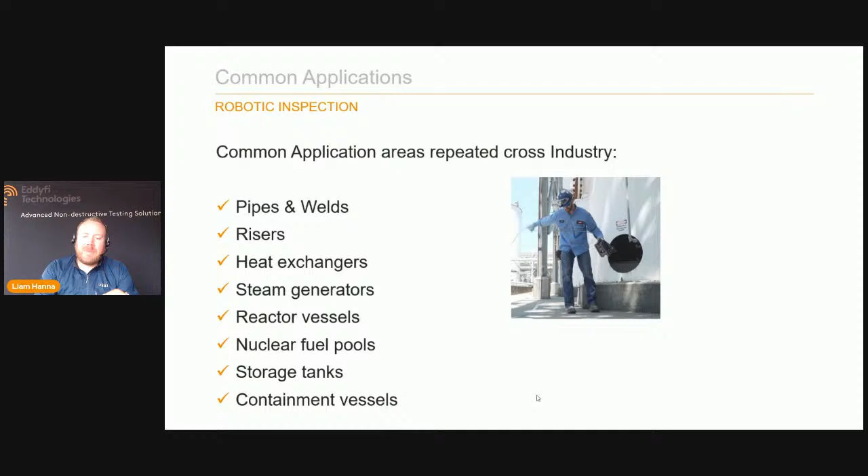Common applications across the majority of industries that we address include things like pipes, welds, risers, heat exchangers, obviously things like steam generators, reactor vessels, and then we look at more specific things like nuclear fuel pools, storage tanks, and then containment vessels. And you can see some images here of the various different robots being operated in this type of environment. Again, there's much more of this available in video format on our website.

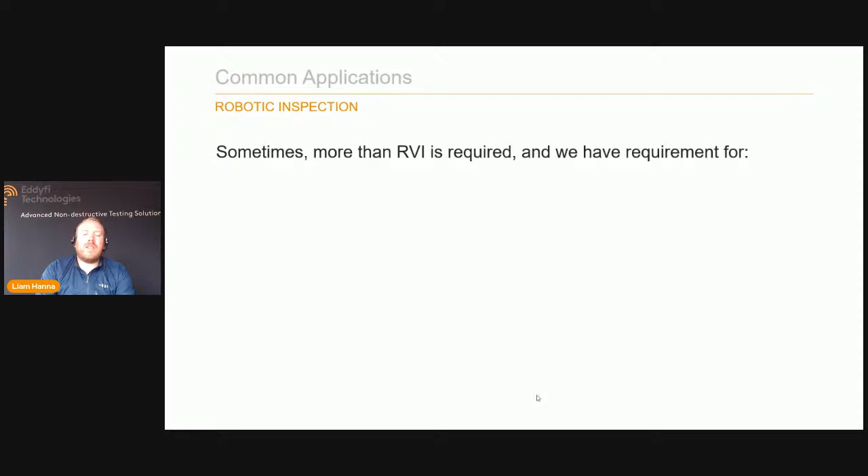Sometimes we need more than just visual inspection. If you're trying to understand the health of an asset and you want to make the best possible decisions, then of course you need as much information as possible. So sometimes we can try and look at using this visual inspection system mounted to a robot, and then we start to mount other types of sensors or other types of tools, which gives us either more information or carries out a task that will try and save money, become more safe, reduce environmental impact.

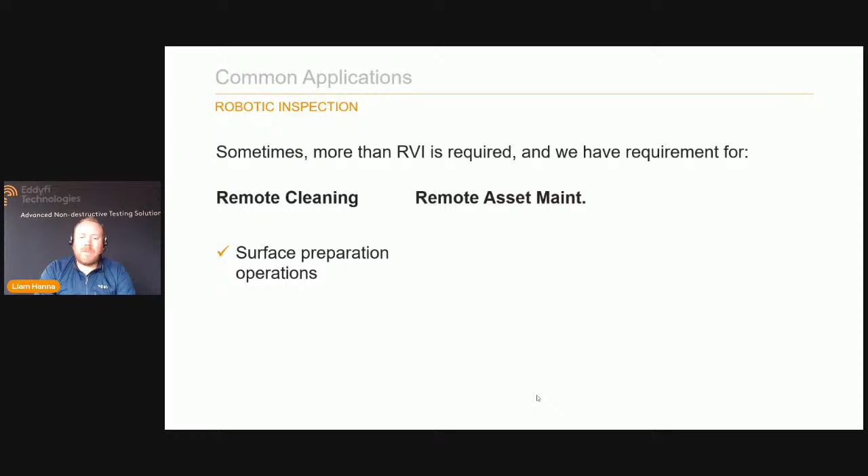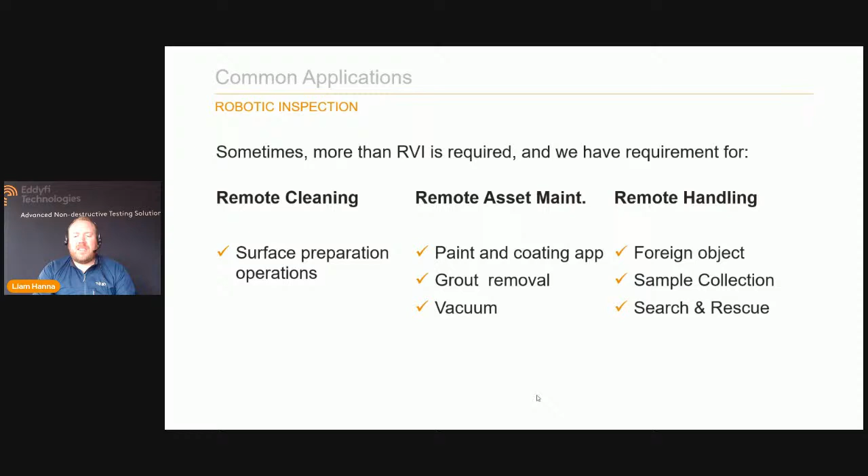This can include things like remote cleaning, so surface preparation for various different operations, remote asset maintenance, so things like coatings and paint application, removal of grout and vacuum, and then of course remote handling. This is really the area where we can start to look at taking a human task and then using a robot to carry out these tasks for things such as foreign object retrieval, sample collections, search and rescue, tool recovery, and then of course non-destructive testing application. And that is going to be really the focus for the rest of this presentation.

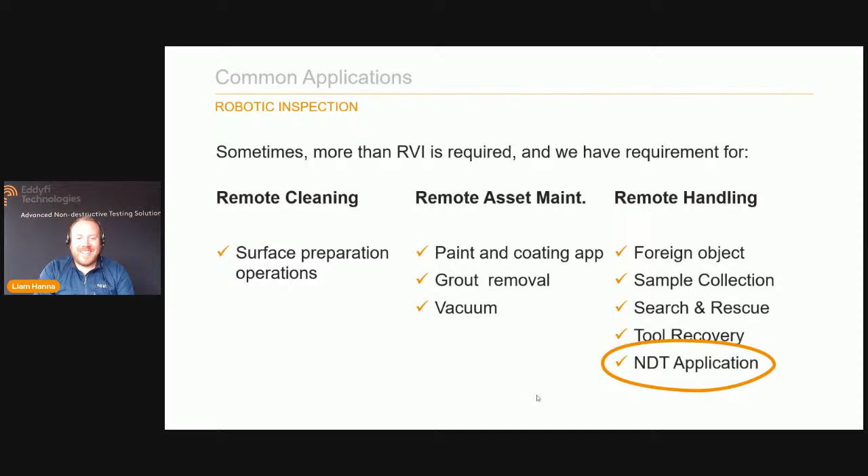And I think before we go on any further, after we've looked at the applications, we can really study how we've got to a position to really understand as much as we do, and then start to innovate and develop products that actually really do work in these environments. And the industries that we are prevalent in, really, if we take the top 5, this generally includes oil and gas, power generation, nuclear, things like security and defense, and then utilities.

And then we look at the applications, and we saw a brief snapshot of the type of applications, but we can simplify that even further and look at the 3 main applications as pipeline inspection, surface inspection, and vessel inspection. And then when you take a step back and look at all of these industries and all of these applications, we can see that all of these applications are generally shared across multiple industries.

So what we learn from the oil and gas industry for an application or a solution that we provide, we can directly transfer that to other industries, and we can learn from all these industries, and they can generally benefit from each other. And that's something that's really, really beneficial from a robotics perspective, because essentially a pipe is always a pipe. So when it comes from a delivery perspective, the system that delivers the equipment or the sensor can generally be very, very similar. What might change would be the non-destructive testing technique.

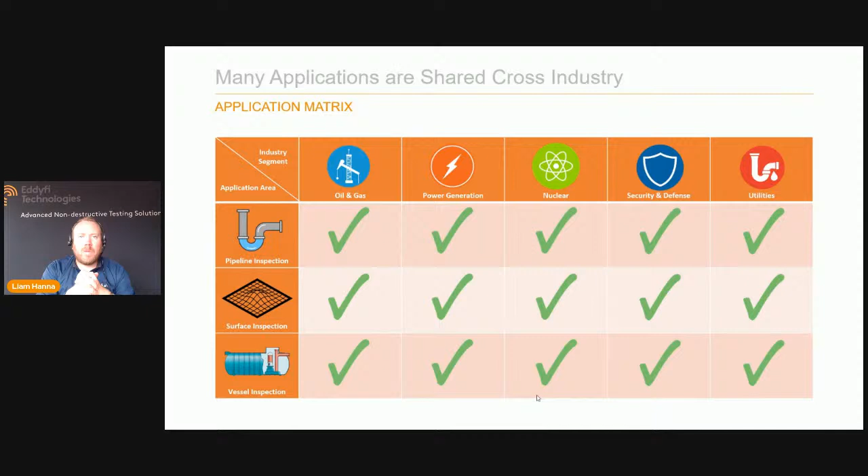But let's look at some case studies, some examples of what we do. And I think I've chosen 2 today to try and, again, simplify it as much as possible. Now, there's hundreds of examples that we could talk about, and I've chosen 2 specific ones, one being a magnetic surface-based crawler, and one being a pipeline inspection crawler.

So the first one we talk about is what we call a MAGG 310. So some of you may have seen this in the past under its previous name of a Mag HD, which is a magnetic robot with a high definition camera. Now the MAGG 310 is a slightly better name based on the fact that it is 310 millimeters wide, so we get some real understanding of what this means when it comes to this specific robot. So this robot is capable of traveling up to 100 meters. So it's a relatively long distance for non-destructive testing, relatively short distance from an Inuktun or Eddyfi Robotics perspective.

It has a high definition camera with lots of different offset, multi-directional lighting options, and laser projection available for some scalar measurement. We've got a number of different types of actuators and arms, which can be used for the integration of sensors and probes. And of course, we can look at further integration for things like tooling and maintenance applications or surface preparation.

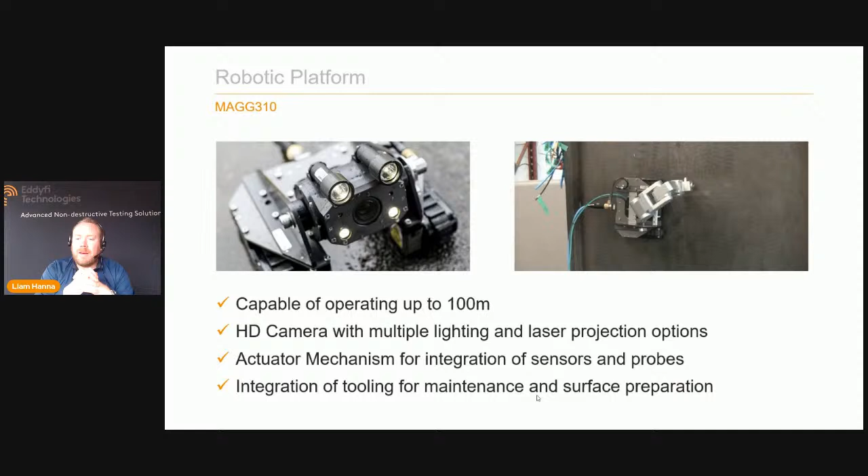One of the first probes that we've looked at using is one of these, a Sharck probe, which is a tangential eddy current array probe. So this is really designed for single pass crack detection, whether it's longitudinal or transverse cracks. It's got relatively wide coverage, and we can travel very fast with it. So we can travel at the top speed of the robot, which is around 7 meters per minute, I suppose, for an inspection scenario, and we can acquire data in that scenario.

You've got an actuator mounted to the front of the robot, which can, of course, carry out a visual inspection at the same time as the crack detection inspection with the Sharck probe. We can lift the probe off of the surface when we're driving around to try and increase the life of the wear parts of the probe, and then we drop it when we want to get to a location where we believe we've found something that we would like to measure.

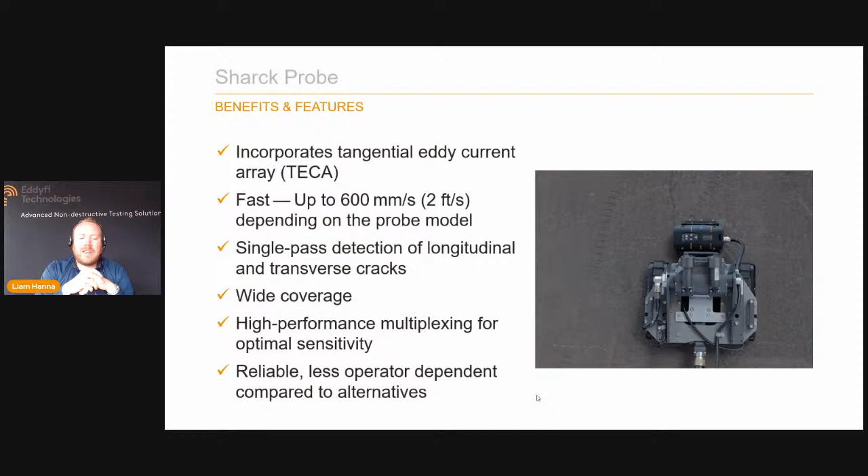Now, one of the benefits of this Sharck probe is that there's some compliance built into the bottom of it, and actually overall it's much less operator dependent compared to alternative solutions, which is really beneficial when we consider a robotic solution that's being sent into a specific location. Something to consider.

One of the other options that we have used frequently, and actually we've been doing some demonstrations today, so we'll have some videos available hopefully towards the end of next week, is with one of our dry coupled wheel probes. So we have an R-scan probe, which is available through our Silverwing Center of Excellence, and this has optical encoders included, so it doesn't have to be used in a ferrous environment. It can be non-ferrous or ferrous, but the magnetic encoder wheels keep the probe nicely in contact with the surface.

So actually the R-scan probe, if we're in a relatively well-prepared environment with no major corrosion pitting, for example, we can obtain good wall thickness scanning dynamically, without the requirement for couplant, because the dry coupled probe itself, the rubber material, is the same velocity as water. So this effectively means we can negate the requirement for couplant itself.

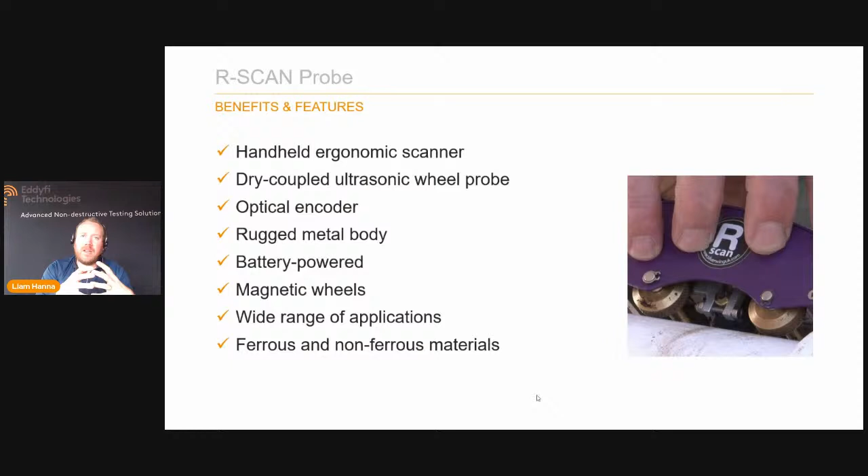But like I say, this can be used by hand or attached to a robot. If you're in a scenario where you can carry out some external inspection in a relatively safe environment by hand, you can do that, and then you can mount this to a robot, for example, and carry out a robotic inspection in this particular scenario.

One of the other examples that we look at is how do we operate in a marine environment. So we have multiple requests for thickness measurements, dynamic thickness measurements for things like FPSO hulls or ship hulls, or even things like jetty piles, like metal jetty piles, magnetic ones.

And actually what we can do here is we can look at... I'm going to turn the volume off because this video's got some terrible music.

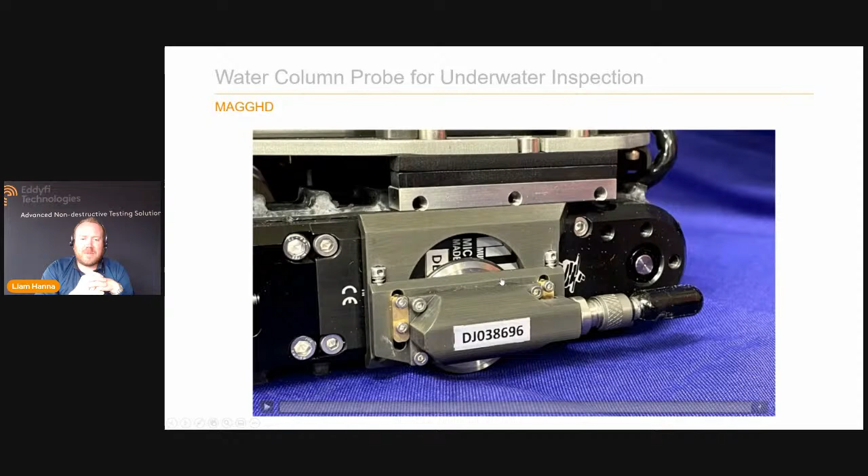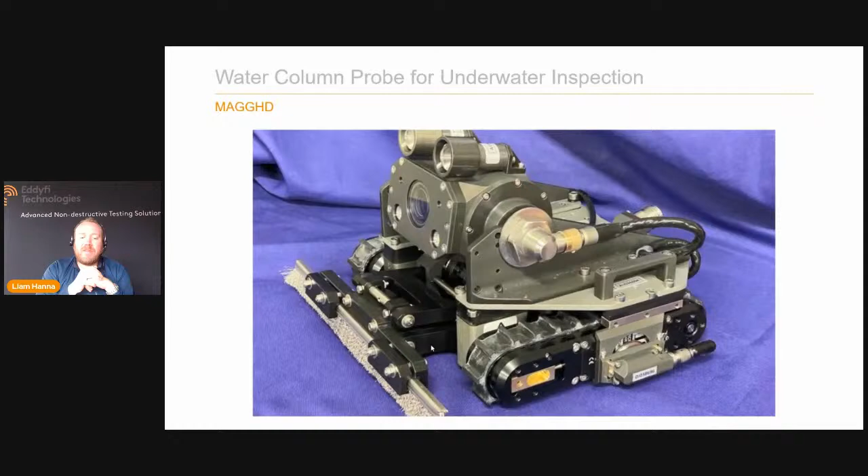We can look at a specific solution for that. So here we have the same system. It's a magnetic robot. In this particular application, there was a requirement to move some of the marine growth away. It was like some slimy marine growth. So we used a metallic brush on the front of the system, and then we have a UT probe attached to the front of this.

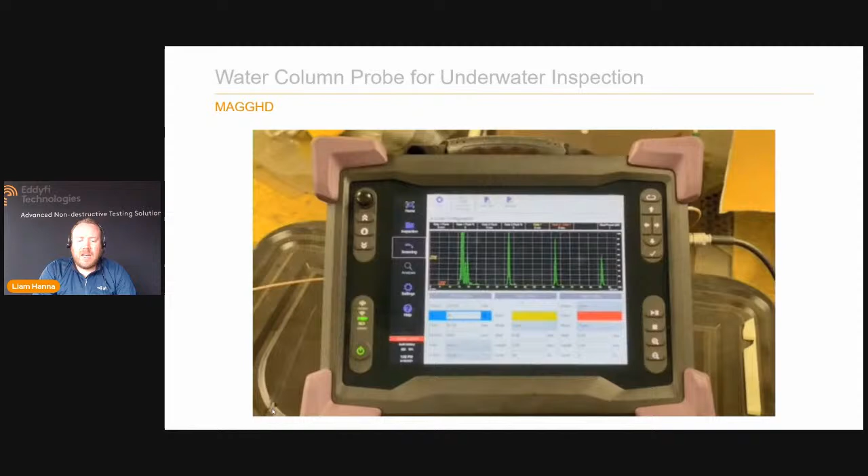Now, this particular UT probe has a 100-meter cable. You can see there's actually no interference of concern there. And we can get good B-scan data, so like a nice dynamic scan and an understanding of the thickness of the material. So this can be used 100 meters away, fully submerged in water. The complete system, the robotic system, is submersible to 100 meters.

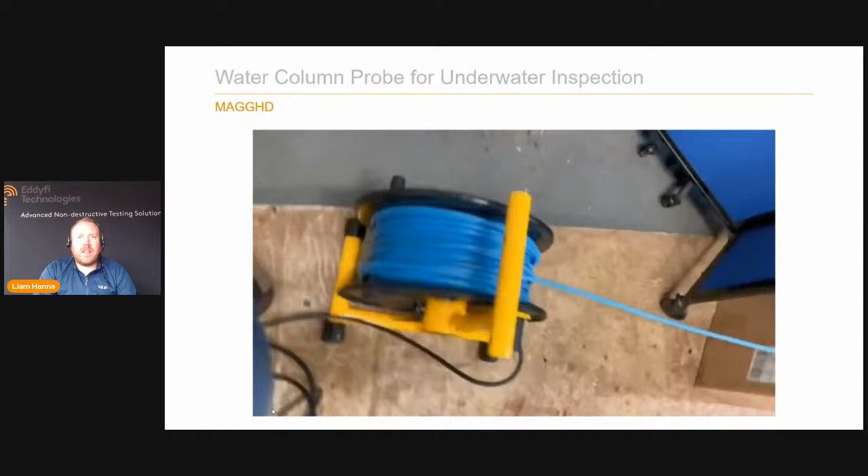We've got cathodic protection on there, so it inhibits some of the corrosion that can occur from operating in salt water, for example. And of course, the probe design is such that the water becomes the couplant for that particular environment. So there's just another solution that we can look at.

And finally, we've got examples where we look at pulsed eddy current. So pulsed eddy current is a fantastic solution where we're in an environment with potentially coatings. So for example, there's a coating on a material. It might even mean that we can't magnetically adhere, so we're looking at this purely from a surface perspective. But with pulsed eddy current, we've got probes that are able to be lifted away from the surface.

The distance varies depending on the material that we're looking at and what we're trying to see, but it's a fantastic tool predominantly for screening, but also for some sizing of defects, which enables us to go through an area and get a good understanding of where there may be some corrosion, for example, underneath a coating or through a coating. And then any destructive testing that needs to take place can take place in a pinpointed way, rather than having to remove large amounts of coating or insulation, for example. It's a real strong benefit.

Now, if you want to talk in more detail about pulsed eddy current, or indeed any of the ultrasonic techniques that we talk about, or eddy current, then there's people that are much more qualified than I am. My background is very much robotics and visual inspection, but there's people that will be more than happy to take questions further on this.

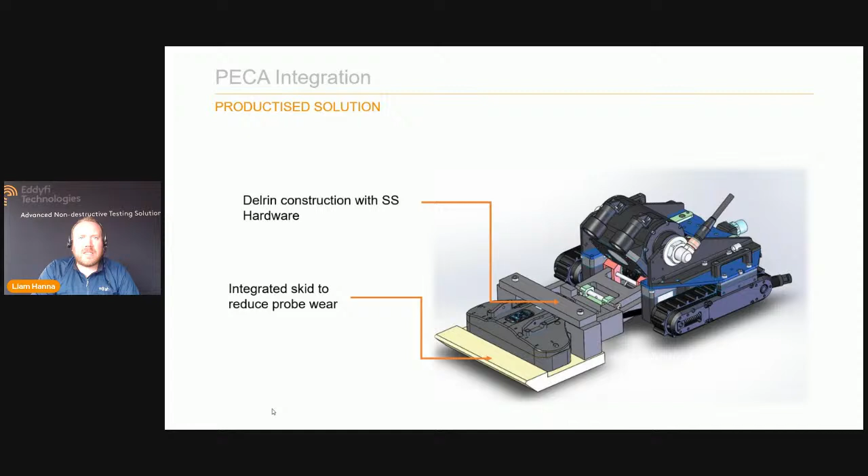And then finally, we've got the visual inspection. So visual inspection is a really important part. Essentially it extends the reach of the human eye into areas that we wouldn't generally be able to see. And it's often overlooked as relatively subjective, but when you start to combine that with UT and other NDT techniques, for example, you really get a good understanding of what's happening. And we can be more advanced in the way that we capture our inspection data.

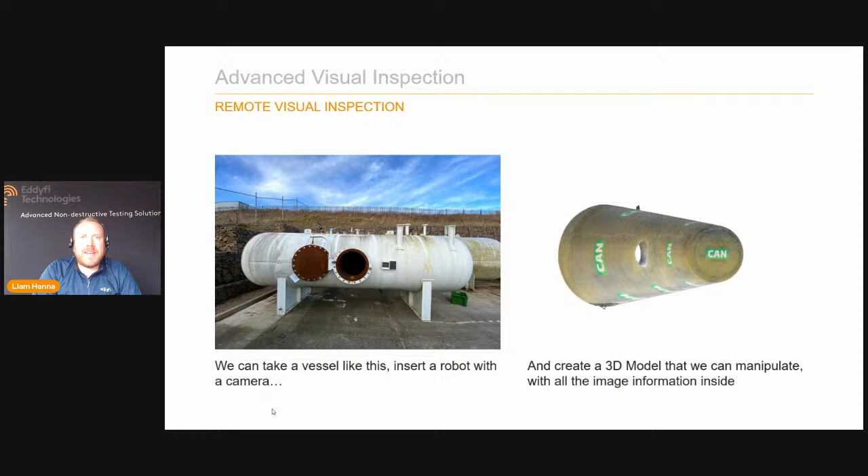So for example, we can take a vessel, have a robot enter it, take lots of images, and just using software we can create a 3D model that we can manipulate and that contains the image information inside. So this is a really good first step in understanding the position of a robot and the position of indications, which becomes important when I talk later on about the real benefits for industry and the understanding of a scenario and how that works in these environments.

And then finally, the last case study that I would like to consider is one of our Tritrax 380 systems. So again, Tritrax has got 3 tracks. The 380 basically means it will fit inside a 380 millimeter diameter pipe. Actually, this specific custom solution will fit inside a slightly larger pipe because we have some things mounted to it. But we'll see this on the next page.

But essentially, sometimes we need to travel in pipelines and we need to travel vertically, and the problem with traveling vertically is that if the pipe is made of a non-ferrous material, or if there's a large payload, then a magnet is not going to be good enough to get us through that environment, especially when we want to travel long distances. So for example, the TT380 or Tritrax 380 can operate up to around 1,000 meters. It can operate vertically, not continuously vertical for 1,000 meters, but it can operate for 1,000 meters with vertical portions.

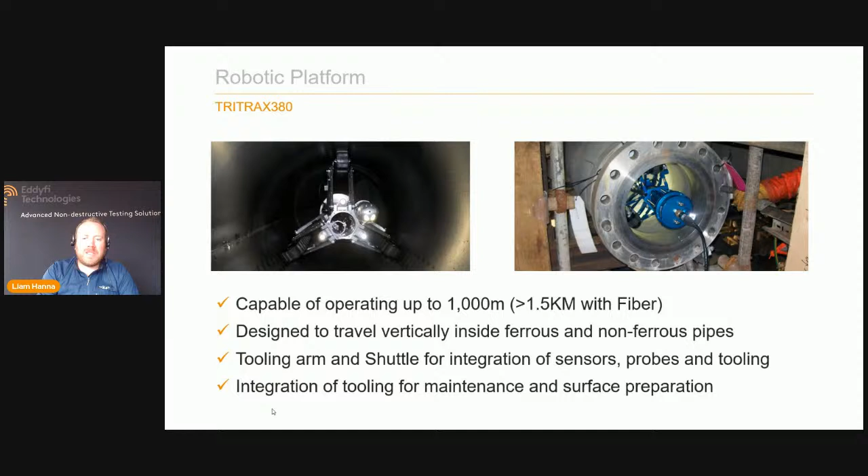We can travel even further with fiber optics. We need fiber optics when we go past around 1,000 meters just for data transfer, for example. It can travel in both ferrous and non-ferrous pipes vertically, which is interesting. And the most important thing is that we can add a tooling arm and a shuttle to integrate multiple different sensors, probes, and tooling solutions to carry out pipeline inspection from the inside without the requirement to excavate or take various sections of pipeline apart, which is a real benefit when it comes to saving costs in excavation, civil engineering, etc.

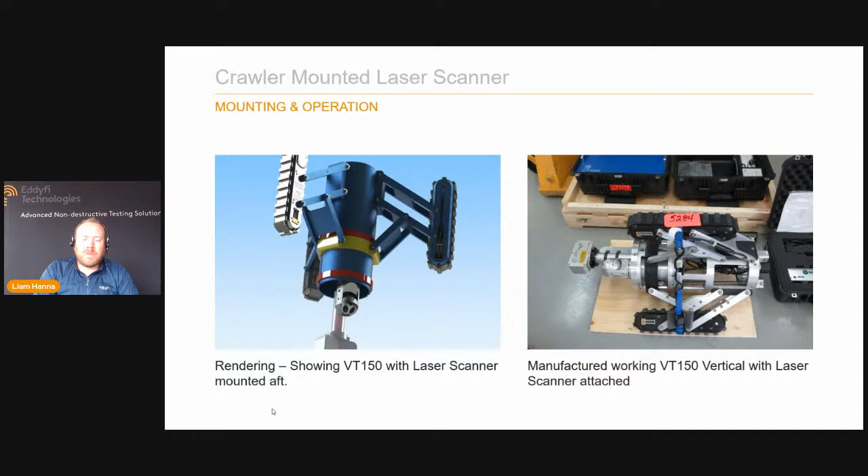Quite frequently, we mount laser scanners to these. So you can see a rendering on the left-hand side. On the right-hand side, you see an example of a robot with a 2G Robotics ULS 100 laser scanner attached to the front, which will give us a good indication of internal pipe condition. There's an example here, so we can see a nice heat map with things like corrosion, any loss of material, ovality. You can carry out very good sub-millimeter accurate measurements using this type of technique, which is really good for internal inspection.

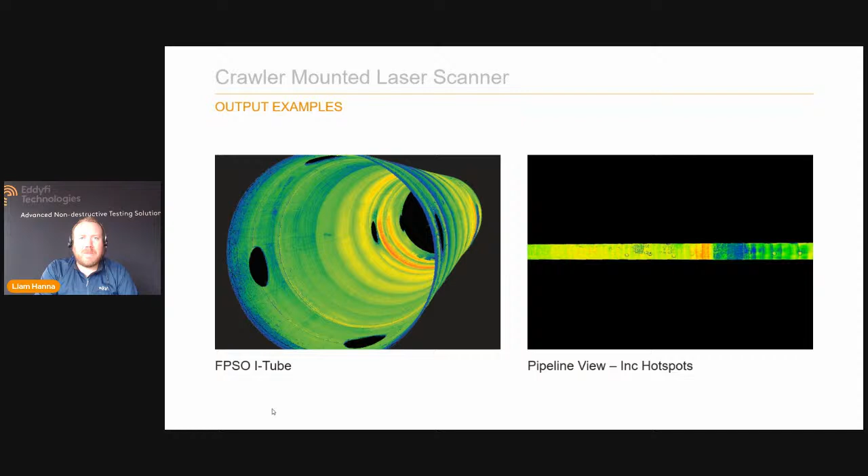Of course, if you can only access the inside of the pipe, you can use ultrasonics. Of course, you can use pulsed eddy current. You could use ACFM for various different parts of this pipe. Essentially, if you've got a very, very corroded pipeline, then you're not going to get good contact with conventional UT techniques. So actually, a laser scanner is a really good option for looking at internal corrosion and being able to map and measure that. And it, of course, builds up a good 3D model, which is a nice visual representation for reporting purposes.

What we can do is we can mount that to the front of the robot, and we can also mount a UT probe, so we can look at a UT array probe. You can see a close-up image of the shuttle attached to the front. So this is just a modified or customized version of one of the R-scan array hand probes, and we can control that with the robot. We can effectively create a 360-degree scan, which forms a donut. We can move forwards the width of the probe, do another donut. We can stitch all of these together, and we get a really good understanding of what the overall wall thickness is of this pipe.

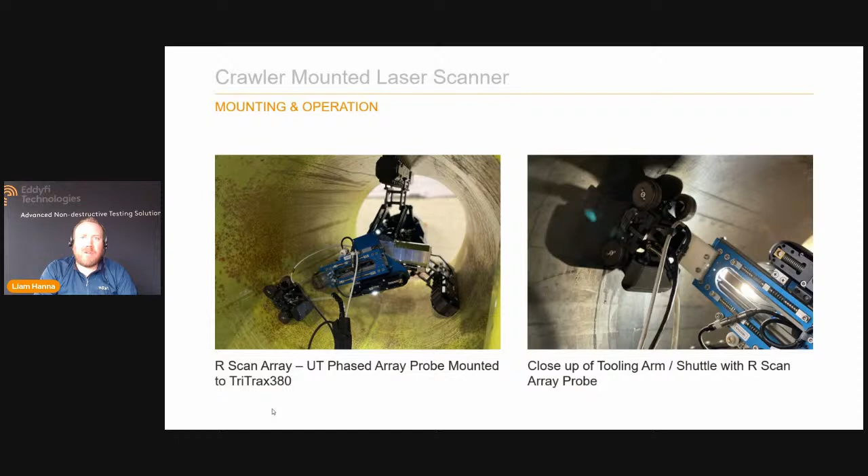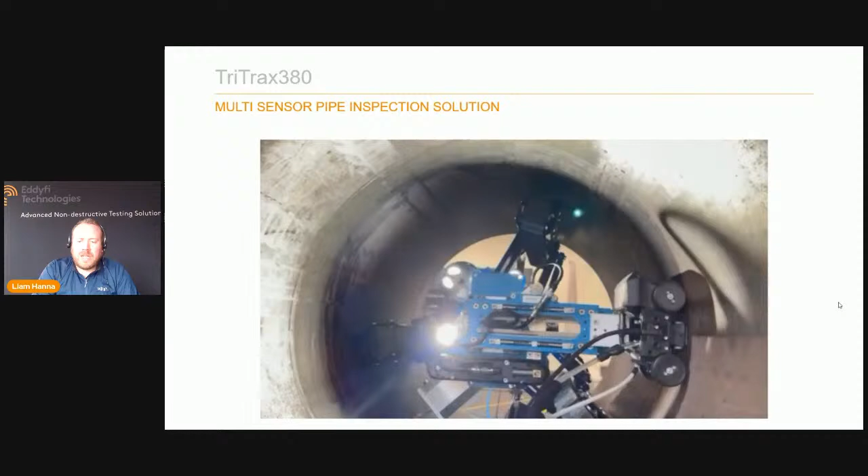So unlike the laser scanner, which will only give us information of the inside of the pipe, this will give us the internal and the external information. So we get a really good understanding of remaining wall, which is really important for the majority of applications. Again, I will mute the sound on this video and I'll talk you through it. But essentially, this specific robot, we can mount multiple sensors to. So we've stuck here a laser scanner, a camera. Actually, there's a number of cameras on here. And of course, this UT probe.

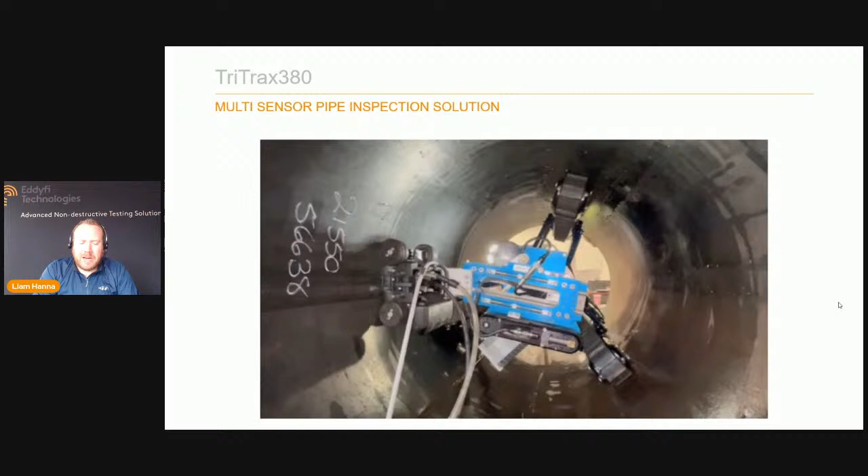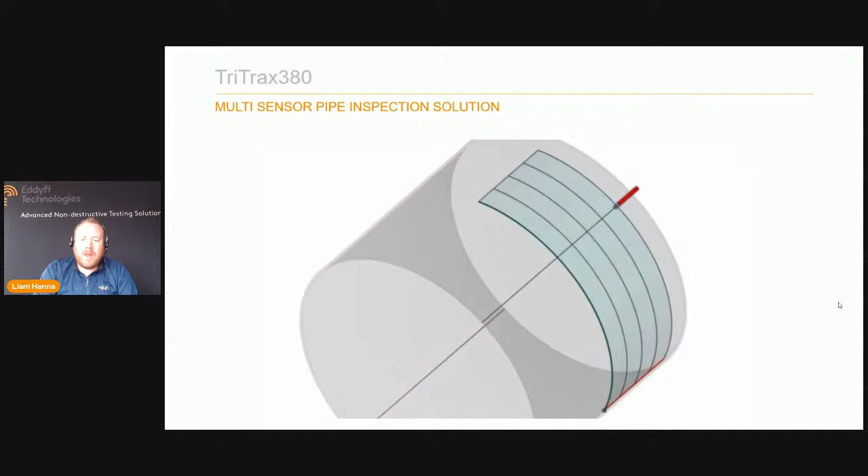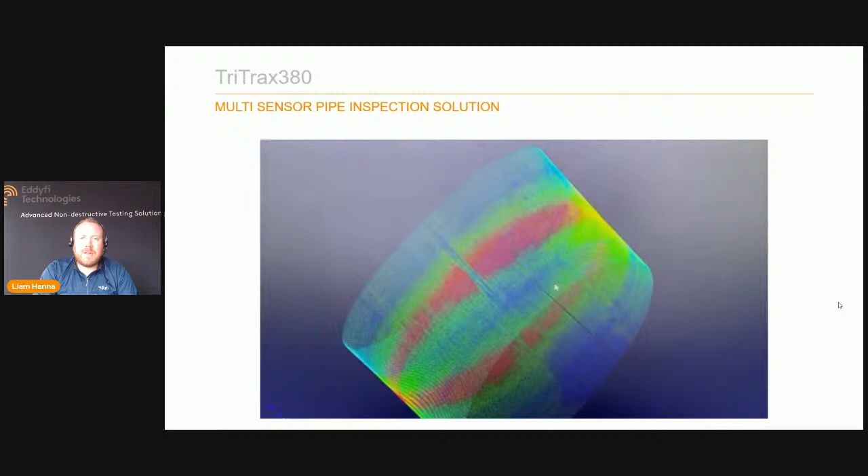So the robot will drive forwards the width of the probe. In this case, I believe it's around 50 millimeters. It will do a 360-degree scan. We'll drive forwards another 50 millimeters, and then we'll start stitching these together. The laser scanner, again, of course, can be used for internal measurement. We can create a CAD file from the laser data, which you can then start to overlay the UT data to, which gives us a real nice 3D model with good, strong data and volumetric data attached. So you can see here you've got a good indication of where defects occur, the size of the defects, and most importantly, the location of that defect.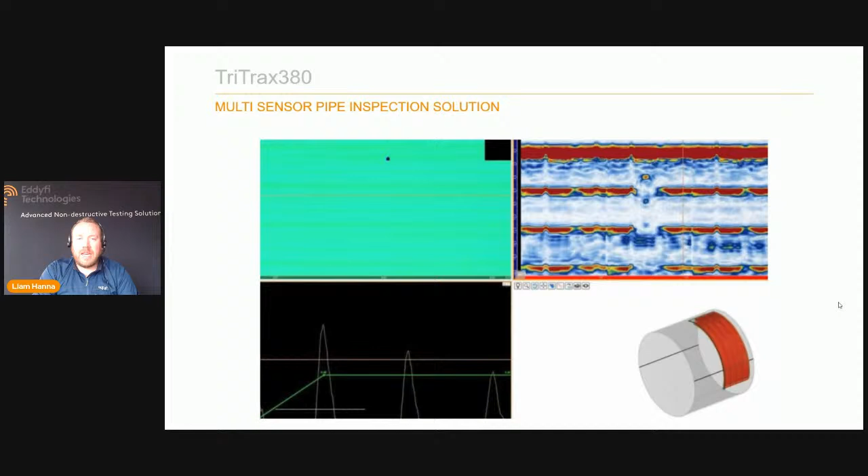So when you come to inspect the same thing in 2 years' time or 10 years' time, we can see if that defect size has increased, and we can see if there's any new defects, and we get a really good understanding of where that occurs within that particular vessel or pipeline, for example.

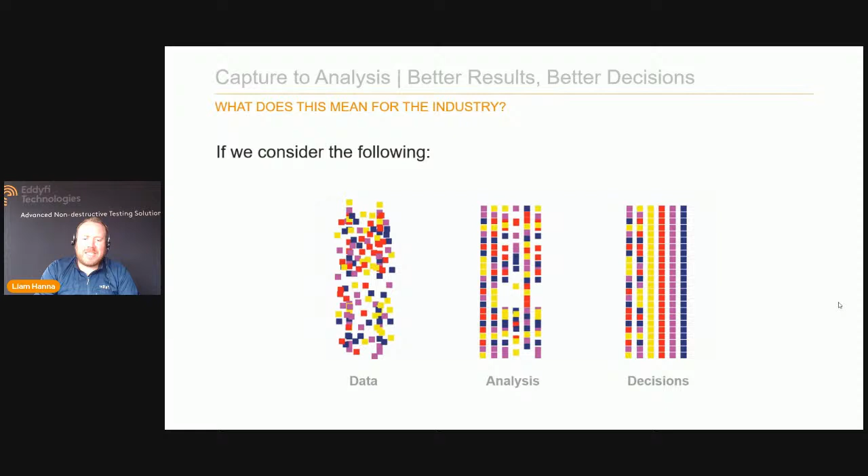What's our deliverable? If we take really three things, I think I've mentioned this in a previous discussion, we've got data, there's the analysis of that data, and then there's decision making. And effectively, if you look at a current inspection, we generally take images of a problem, or we obtain some inspection data using NDT sensors, and then we include that in a report. But it doesn't generally give us contextual information about exactly where the problem occurred, where it was captured, where it was taken, unless the operator who was there specifically adds this manually, which gives an element of subjectiveness to it, and again, an element of lower repeatability, certainly for these internal inspections where we don't have a good understanding of where examples were captured.

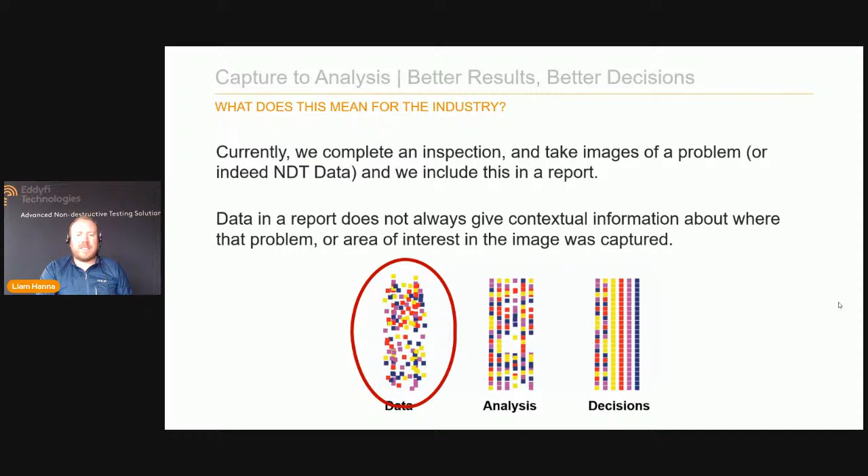So at that point, we really have just data. As much as we report on that and we can start to analyze it, that really is data. So before we start the reporting process, how can we try to improve this? One of the ways that we can do that is by using multiple sensor technology in one place. And that gives us a real 3D visual understanding of that.

So if we take the example of the pipe scanning robot, which had a laser scanner, a phased array UT scanner, and some cameras, we can use all of that information combined with all of the encoded information to build up a 3D model, which is filled with the relevant contextualized data, which means that asset owners really can start to step inside their assets. And actually, this gives them a permanent record of inspection, so they can revisit that at any time.

You can look at what happened last year, and you can compare these. You can see if something was potentially missed. If you find a new problem, you can compare that to the digital twin from previous years and see how an asset reacts over different time periods and maybe even with different product running through it. And you get a really good understanding of what's happening.

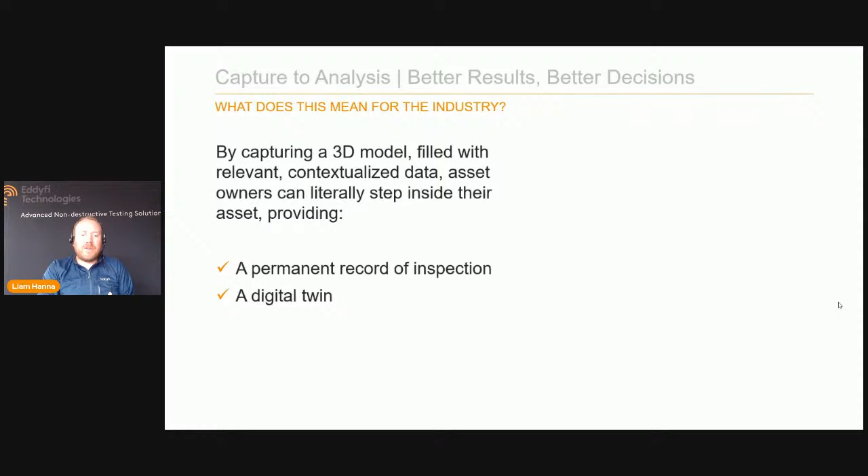And actually, we start to move much more from just data, just analysis, to tools that allow us to make these better decisions. And like I said at the beginning of the discussion, better information generally leads to better decision making. If you've got the tools and the information to make a decision, it's better than having less.